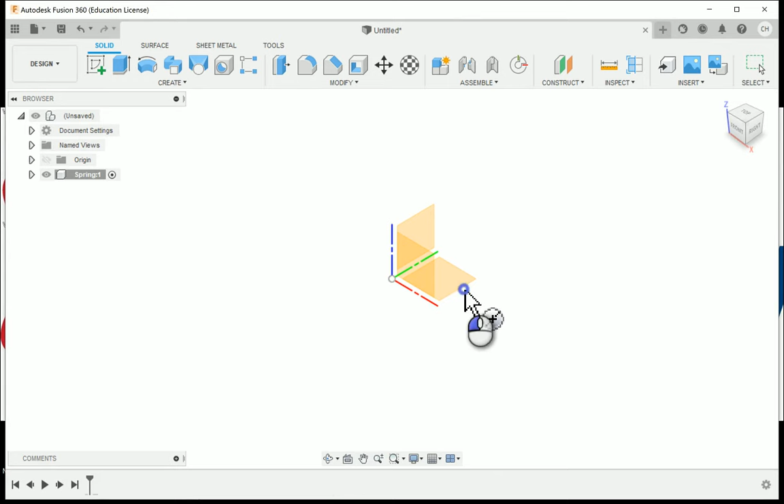We're going to start with selecting the XZ plane as our sketch, and I'm going to create a circle, which is automatically selected for you. I'll choose the origin and draw a diameter and set that to be 0.160, and hit enter. Zooming in to see what it's creating, our coil menu is going to help us out with that.

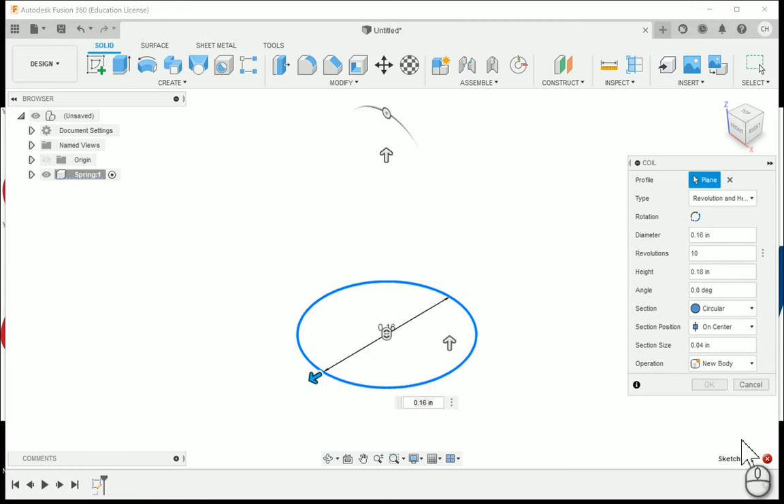The amount of revolutions this spring has is going to be 10 revolutions. This may go through and give you an error message until some of the other items are changed, but here I'm going to keep going. This is going to be 0.8 inches tall.

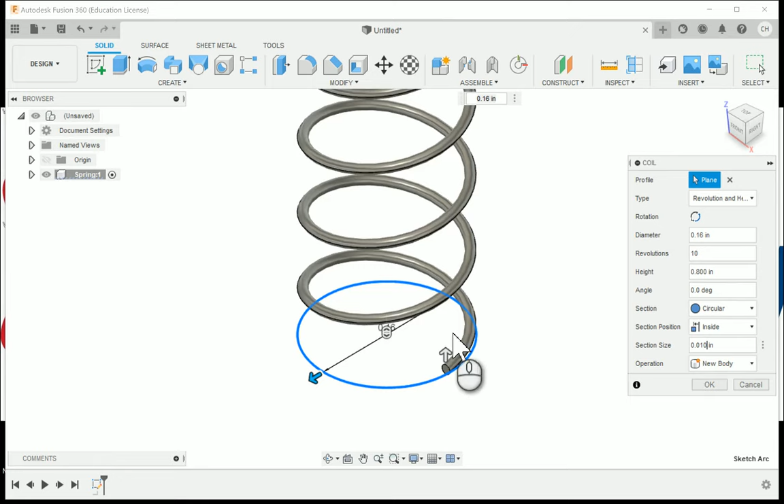And then we're actually going to be on the inside, because I used the dial caliper to measure the outside diameter of the spring, so that means all the spring is occurring inside of this. Our section size will be 0.01, which again was created by measuring the thickness of our spring that we have within our hand from our carabiner pin.

I'm going to go ahead and say OK, and here is our spring that we created. There are 2 ends that will be created as well to match the top and the bottom.

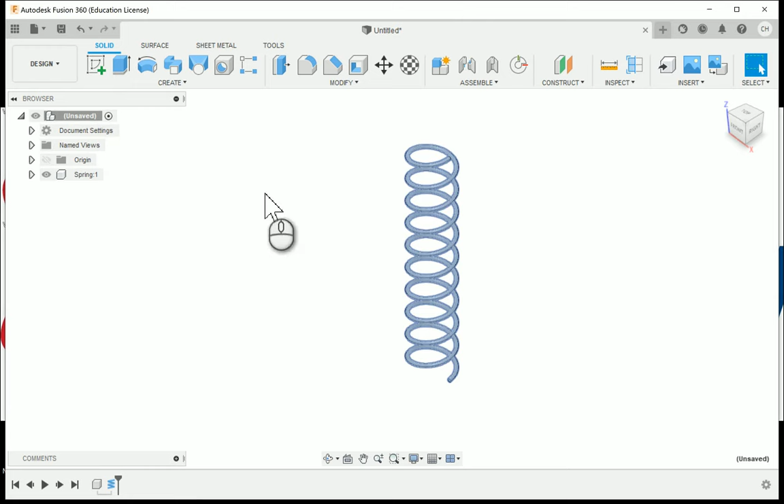So I'm going to go ahead and go to the top level of the assembly, and choose new component. This one we will call spring end. Say OK. We're going to create a coil again, choosing the same XZ plane, drawing a circle to the same diameter of 0.16, and here I'm going to change some of the information.

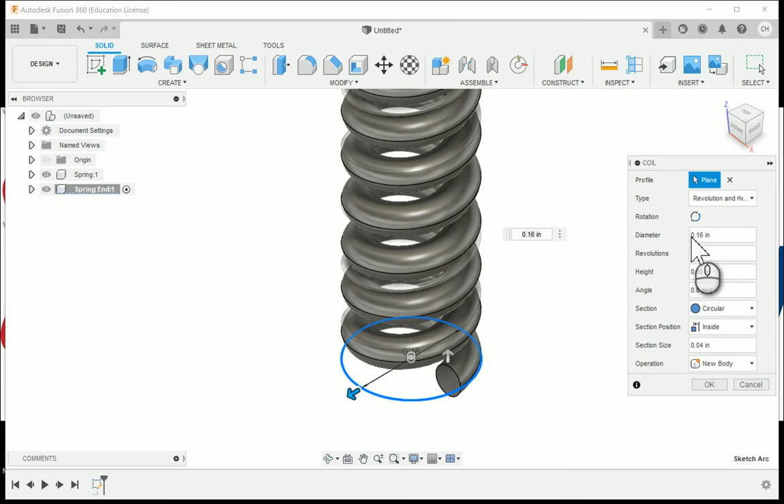So for the ends, still working with that diameter, I'm going to change to still working with revolution and height for our set diameter of 0.16. Here we only have 2 revolutions on this one. The height on this is going to be very small, so 0.03.

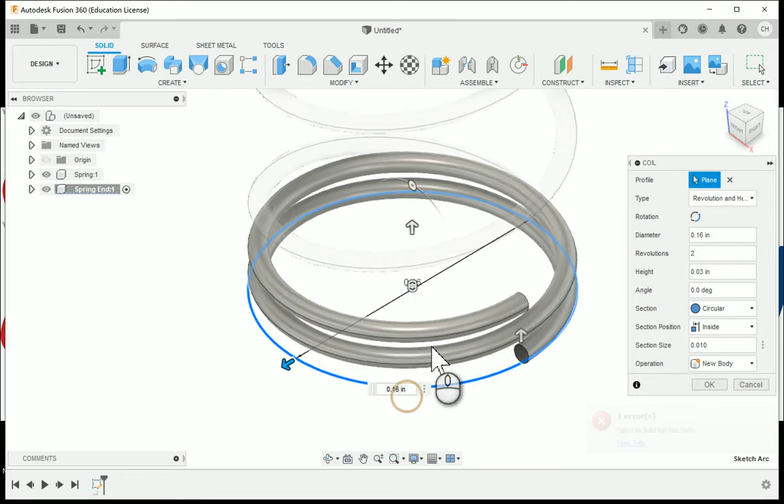And then the section size is going to remain the same as the original spring as well. So you'll see once we have all these still set to the inside, they will also be ready to go. I'll go ahead and say OK. Here is the end of our spring end.

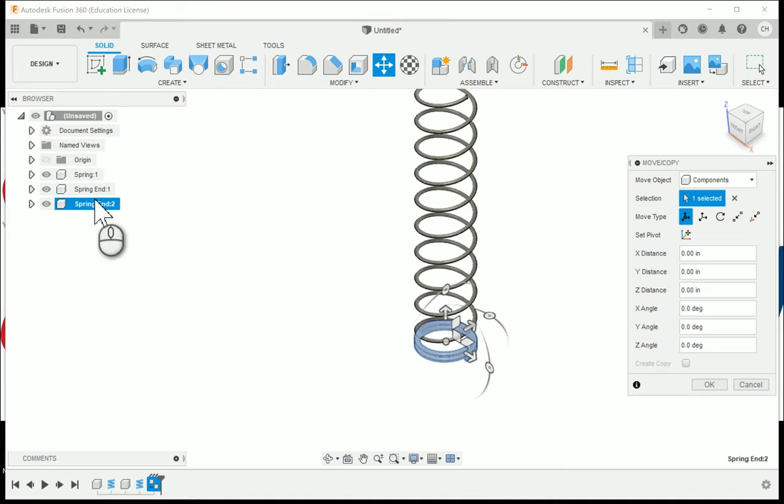And while I'm at it, I'm going to right click on the component and choose to copy. Then when I go up here to the top level, I'll right click and choose paste, and that's going to bring me a second component. I'm going to drag and move this, utilizing the arrows from the move copy dialog, and move that above.

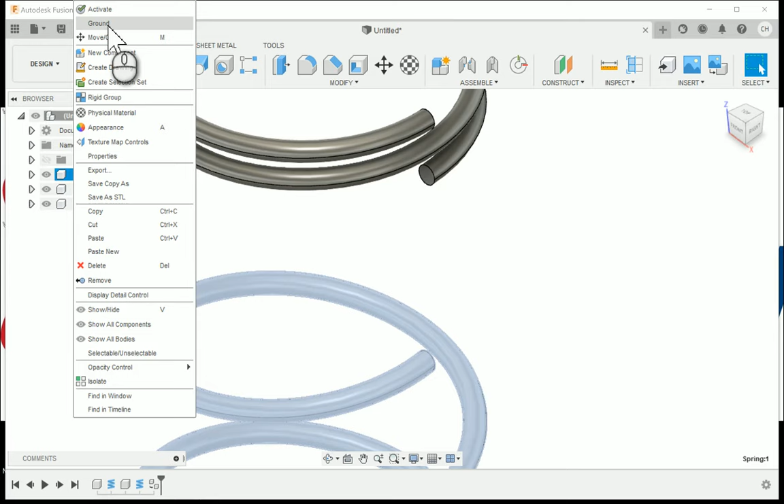The way that we're going to create this, you're going to see the end of the spring from the main body to the end are pretty well set up. I'm going to go ahead and use the joint command. I need to ground it by right clicking on the main spring and choosing ground from the menu. I'm going to go ahead and hit joint.

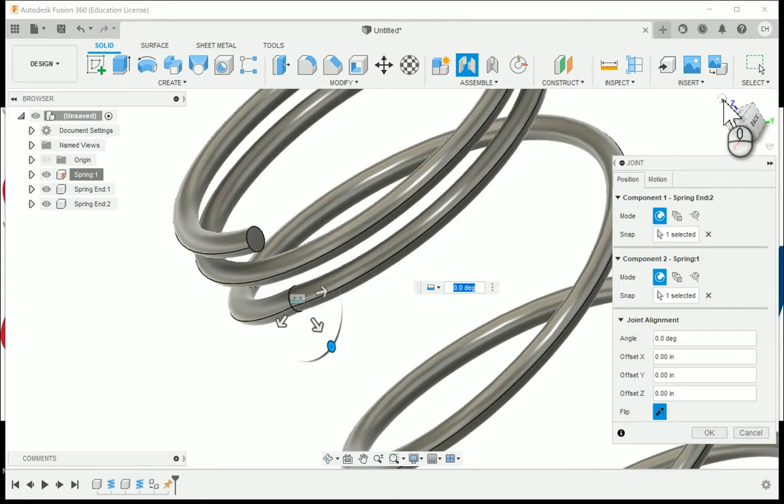I'm going to choose the very center of the end of the spring end, rotating around, and I want to choose the exact same position in the middle for the end of the spring. They will move into place. This will be a rigid joint we're going to apply, and I will say OK.

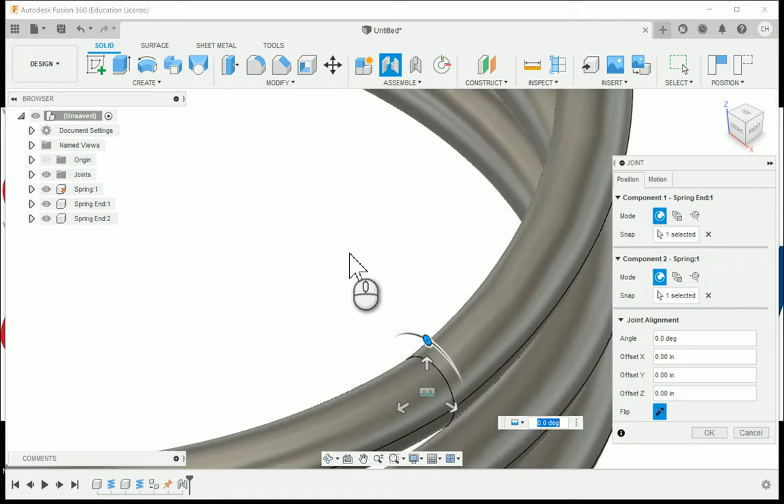Same thing will happen on the spring end here. We're going to joint, choosing the moving component first, so the very center of that spring end, and then we're going to choose the center of the main body, the ending of the main spring there. Those will connect into place. We will say OK, and now we have our spring.

And for this case, we're going to utilize this same file since we do not need to create 4 of these. We are going to use copies of the same component, and I'm going to hit the save button and make sure that it is in the proper project. We will call this barrel spring, to designate these as the ones that end up inside of the barrel, and hit save.

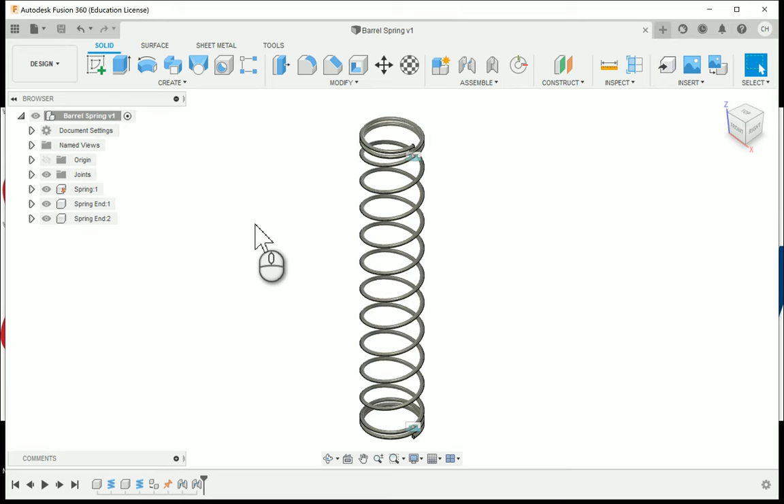This video concludes on how to create those springs. The next video, we'll take a look at some of the other components that are working together to help with the function of that carabiner.